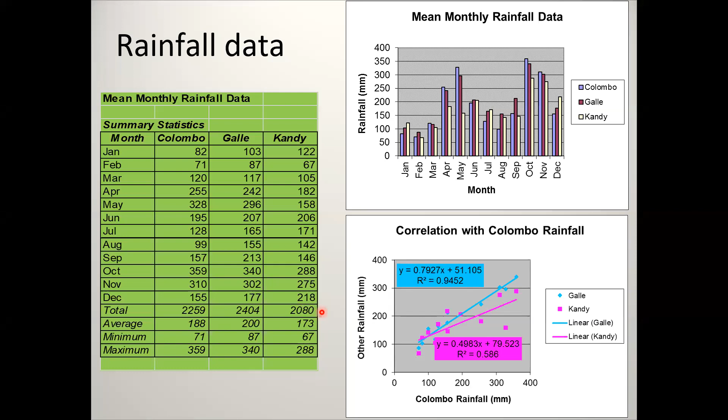Average rainfall for roughly the entire country, half of the country, annual rainfall kind of figure. What is it? This is the total. Yeah, total. And if you average it out, average the total of Colombo, Galle, and Kandy, we can get a rough idea about rainfall in Sri Lanka. I am not sure about that because there is a dry zone and things like that. No, yeah, okay, anyway, thank you for that.

Anybody else, can you tell me what can be done? Somebody has put something in the chat: project the distribution to standard deviation and mean, which will be very useful in decision making. Okay, somebody has suggested a box plot. I'm not sure exactly what you mean by a box plot. I'm just asking for fairly simple things, right?

So, cumulative value? Cumulative, okay, I'll take that cumulative value. So each month you keep adding something very simple that can be done, which I think will give us useful information.

Again, not many students and people do this when they are doing research, is normalizing, right? No one mentioned that. You divide, let us say, Galle and Kandy rainfall by the Colombo rainfall. So we can see here actually Galle rainfall is greater than Colombo, and then Kandy is the least. But if you divide by this, Galle rainfall for January will be something like 1.2, and this one will be something like 1.5. But when it comes here, it will be something like 0.9, because you divide 67 by 71, and this will be something like 1.1 maybe. So if you normalize by Colombo rainfall, that also will give us an interesting picture.

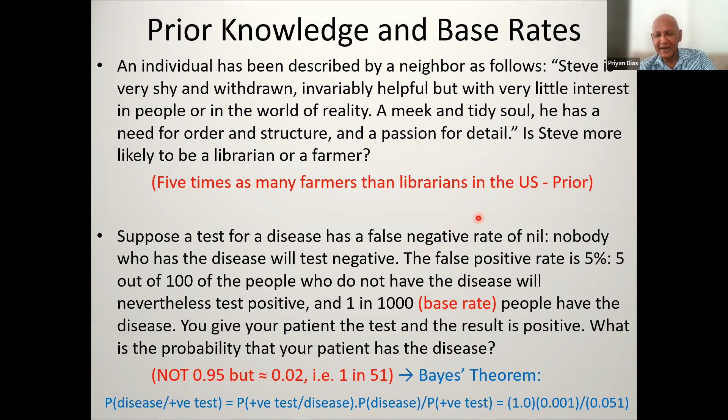Now you might wonder—I did this also just to make this lecture a bit interesting. It's now about half an hour into the lecture, but I won't speak very much more or have this interactive format after this. So the person in charge can ask everyone to mute themselves or whatever, and I will go on like this.

So one of the things about prior knowledge is what we learn from practice, our experience of the world. I've given a few examples of this—what I have called longitudinal corrosion.

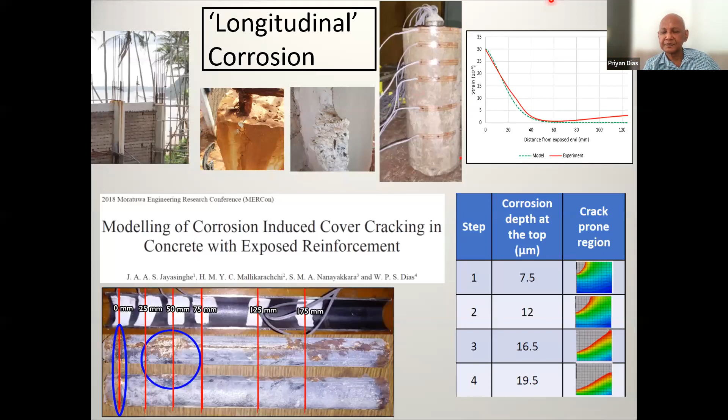Once again, we tried to take a slice of the world. I had to simulate things like sunlight, because the literature says this is affected by sunlight and probably happens between 10 a.m. and 3 p.m., so it's difficult to impose heat. I just used some 200-watt bulbs close to the surface, and to simulate wind speeds, which also create this, I used fans. In order to make this cracking happen, I could not use the actual concrete, but instead used the mortar component so it would be a bit weaker, a little thinner, and manageable in a lab.

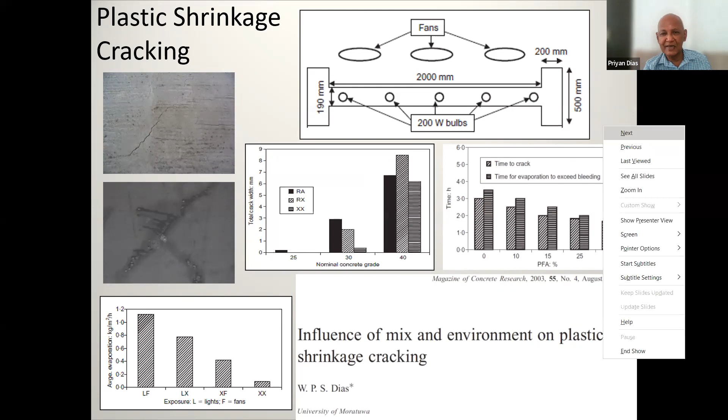So, two examples of getting ideas from the world out there, even though you cannot simulate the world exactly. This is something of a hobby horse of mine, something I'm interested in as a researcher. I'd like to promote this idea of analogical transposition. Big word, and you don't get very much output from it directly, but anyway, I will describe it. You can think about it.

Since the 2004 tsunami, I have been working on things like tsunami resilience. The whole question of resilience has become very important in the world because of increased natural disasters and various other stressors on the environment, whether it is waste, plastic, carbon dioxide, or various other things. So we want systems that are resilient.

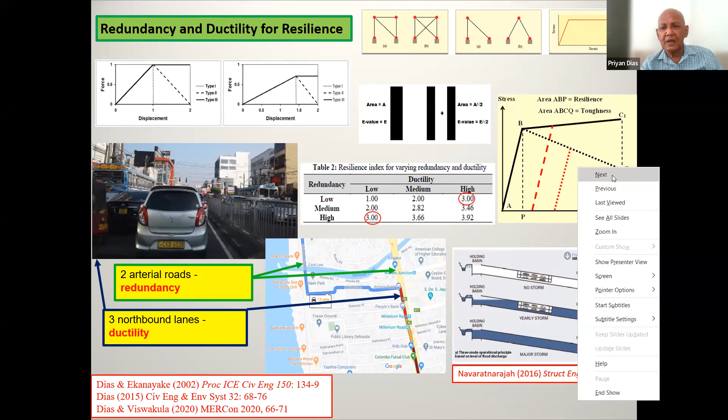Now this is another analogical transposition. This has to do with, what shall I say, structural mechanics again, and I'm borrowing from the field of statistics. Earlier, I used the field of structural mechanics to inform other disciplines.

So I used to wonder whether there were structural mechanics analogies for this. I have to acknowledge Isuru Nanayakkara, who is now doing a PhD in Sheffield, and of course Chintaka Mallikarachchi was also involved in this a bit.

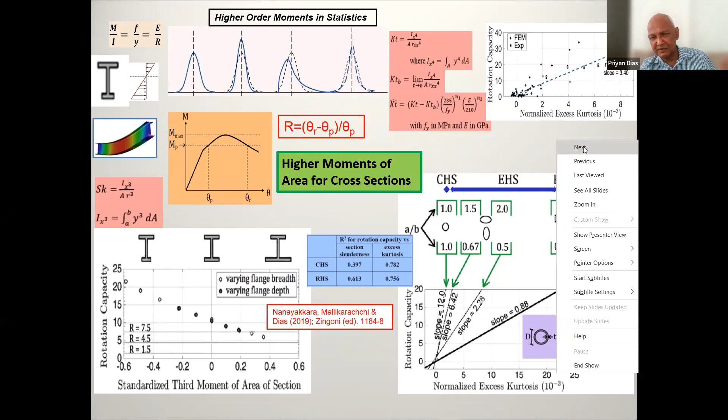So you don't want to have a separate detention area for the rainwater and a park for the people as well. You do both in one. So you don't have redundancy, you save money. But you have to experience deprivation once in a few years. So this is about transferring knowledge, prior knowledge from one discipline into another.

Now this is about some research techniques, transferring research techniques that you knew about earlier, maybe to a new area. This is ANOVA. I don't know whether these techniques are also being done or whether that's not part of this course. But when I was doing my PhD from 1982 to 86, this is my supervisor, Patrick Sullivan. Actually he published this in 2004, but he was working on this with another student even at that time. This paper is called a probabilistic method of testing for the assessment of deterioration, etc.

Basically what it means is if you have a number of variables, you can study the relative influence of each variable. Let's say if you have maybe 3 variables at 2 levels, you have to actually do maybe 6 tests. But if you are clever... and if you have 2 variables at 5 levels, then you have to do 2 to the power 5 tests, or 5 to the power 2 tests, I can't remember now.

Anyway, I was aware of this technique. So when I returned in '86, this was published in '94. I looked at, I applied the same thing for mix constituents and things like that -- the mix proportions, the slump, the amount of compaction, and the amount of curing. And you looked at strength. This has to do with... it doesn't say what this is on, strength and durability. I think this is on strength.

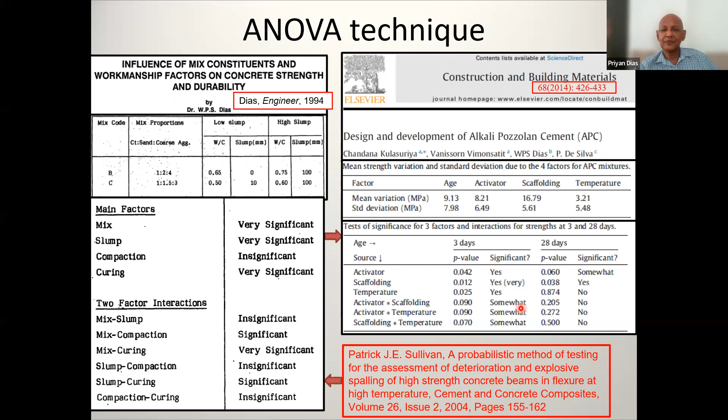So if you have used a particular technique before, you can use it again. I'm going to use, I think, another one of Anjana's research. But before that, originally, this has to do with...

This has to do with qualitative research. Some of you may be in qualitative research. This I did many years ago.

I think maybe soon after the central bank bomb blast, that was in 1996, about what factors contribute to the vulnerability of buildings. So we looked at different case studies.

We did not have case studies properly documented in Sri Lanka. Even if we did, the Ministry of Defense in Sri Lanka was not going to give it to us. But I made some contact with the Royal Military Academy somewhere in the UK, and they were quite happy to give me their documents.

So you look at these documents, look at the description of different events, and find out what phrases are repeated. That's called data, and this data is not like rainfall data. When you combine this data, this is called grounded theory - this whole concept is called grounded theory because it's grounded in the information. It's like you're generating theory from the data.

Then, of course, you have slightly higher level interpretations of this data called interpretation. So for example, reinforced buildings did not collapse, which means reinforced buildings can withstand considerable blast. Masonry construction is weak against blast. So this is a bit of an interpretation.

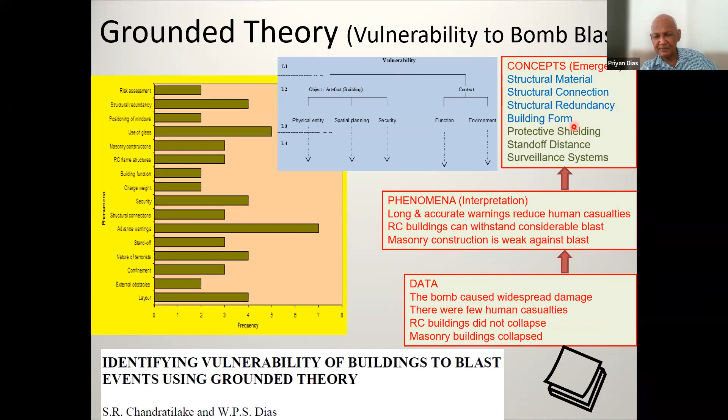Now Chandana brought to the table this concept of integral theory, which is not a bottom-up theory like this one, where you get the concepts or theory emerging from the data. If you think about integral theory, already the top level is determined. It means that if you study any subject, there will be an individual subjective aspect, a collective subjective aspect, an individual objective aspect, and a collective objective aspect as well.

So what we did here in this research was try to marry integral theory with grounded theory. For the top level, we did not generate the top level from these, but these concepts that were obtained. Here I have called it concepts, here I have called it phenomena, or we actually, these are all done together with other people. Here we fitted these concepts into these different quadrants. So once again, research done by other people to be aware of, and how do we apply it to your own research?

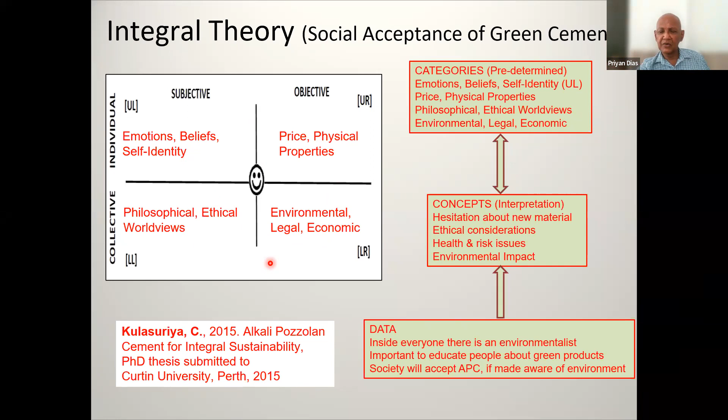Right now, we get a bit more specific because prior knowledge has a lot to do with literature. I think you have already had a talk on literature survey, so that is good. I just want to make a few remarks about the literature. One is actually the way that you structure this literature. Actually, one of my papers, not all, right?

I actually put a table like this as part of the literature review. But this, of course, is in a very narrow area. It has to do with this paper about the influence of drying on concrete sorptivity. Sorptivity has to do with the absorbing of moisture. So there are different ways in which you can dry specimens, different durations in which you can wet the specimen, different strengths and water cement ratios of the specimens, and different sizes, because sorptivity testing had not been formalized or standardized. And then the sorptivity, the absorption, is linear with the square root of T, but for different durations, and then you can calculate the sorptivity. I'm not going to go into all the details there.

When you're doing a literature review, if possible, whether you write it up like this or not, if you do a table like this, then any reviewer of that paper will see that you have a very organized mind. A very organized mind. Some time ago, there was a colleague of mine who was doing his PhD at the same time at Imperial College.

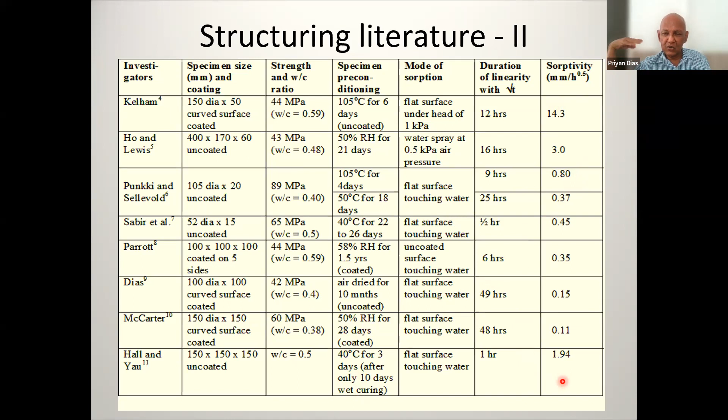So I'm just giving you various ideas. This is now using prior knowledge in a structured way based on the literature. But more than that, very often I find that when people refer to the literature, it's only at the early stage of either their research thesis or the paper.

Now, if you're writing a paper, most times journals would expect you to write your literature review under what is called the introduction. So the introduction serves as where you do your literature review as well. Then you say, okay, these are the gaps in the literature, this is what I want to do, these are my objectives, methodology, then results.

However, once you do this curve, it is always very good. Referees will know that you are trying to locate your work in the general body of knowledge. It's a very important concept in research, because you're not trying to solve the problems of the world by yourself. You have to look at the literature to find out whether somebody has not investigated something. And then when you find something yourself, like maybe this curve, you have to see how other people's work fits into this.

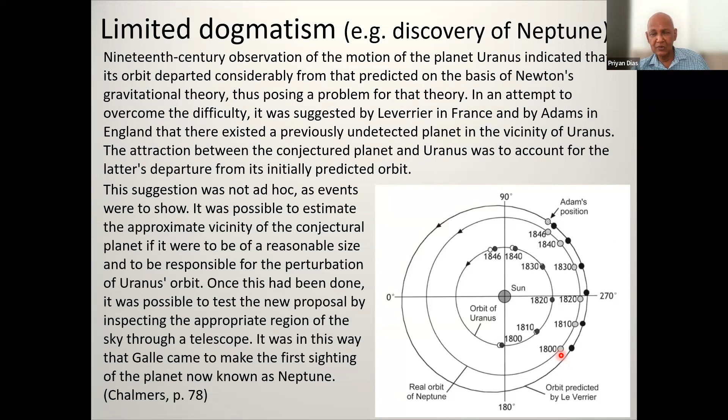Now, how does this relate to research? This is some research I did about whether you trust the authority or reject the authority. Many of you know that if you replace Portland cement with fly ash, many cement companies are doing that. Fly ash is also being produced in Norochcholai, so it's getting rid of some of the waste, though not all of it. People around there may be having some difficult times.

There's a big debate about whether we should have another coal power plant or not, but the PFA part of it is being used. In fact, some of the PFA was used for the Lotus Tower. The PFA is actually integrated into the cement, and that's called Portland pozzolanic cement or something like that. We were asked by this cement company, now called INSEE, I think - earlier it was called Holcim, before that Holderbank - when it was Holderbank, they asked us to do this.

So you can see Professor Nanayakkara has collaborated with me in a lot of this work, a lot of the concrete work.

Now what happens is, let's say 15% of cement is replaced with fly ash - especially early on, you're going to have lower strength. So here you see the strength ratio - I talked about a ratio of rainfall, this is the strength ratio. When you take ratios, you get interesting insights. The ratio of pozzolanic cement strength to pure OPC cement strength should be low at low ages - at 7 days it's something like 0.83, and then at 14 days it gets close to 1. At 28 days it can be even equal or more, and then it can increase further.

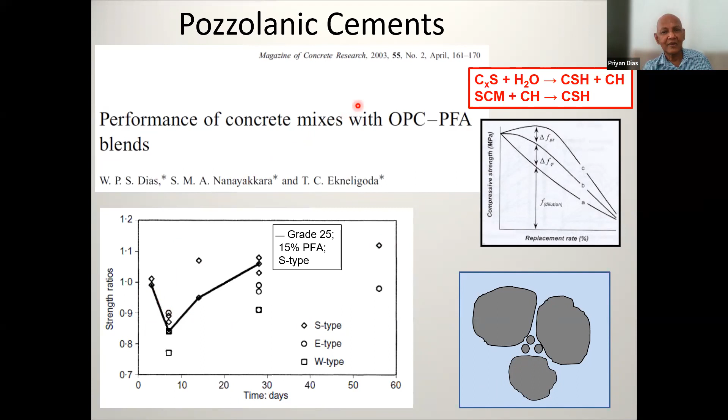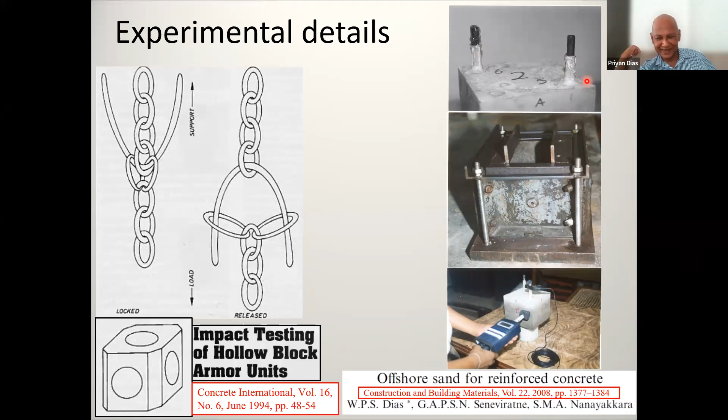One last thing, I mentioned this earlier. This is a new theoretical idea about excess kurtosis. I have nothing to do with this - this is my student, Isuru Nanayakkara. Earlier there was a relationship between skewness and rotation capacity for an I-section.

But for hollow section, he used what is called excess kurtosis - the kurtosis of the section, like a statistical distribution, the distribution of material in the section, minus the kurtosis at a theoretical zero thickness. I will not go into this, but this concept of excess kurtosis.

Now, actually I wanted to call Isuru and ask him how he got this idea, but in the literature there is this thing about positive kurtosis. This is a normal distribution in dotted lines, which by definition has a kurtosis of 3.

So positive kurtosis means higher peakedness - it has a greater peak, and also fat tails like this, but peakedness is the main characteristic. This idea of kurtosis in excess of a normal distribution is there in the literature, so maybe Isuru would have come across that as well.

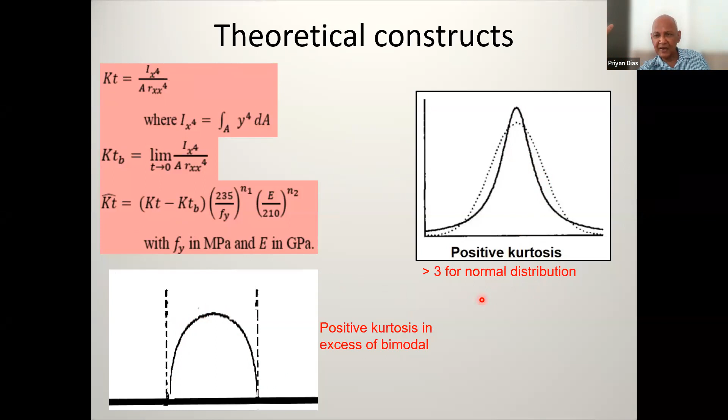So even these theoretical constructs, we come up with various ideas. Maybe it depends on us keeping our eyes and ears open to the knowledge that exists previously. Okay, I'll finish with this one.

The years go back to 1675. So, prior knowledge - Isaac Newton is supposed to have written to Robert Hooke. You know both those names - Hooke, we get Hooke's law from, but Newton, of course, is the much better known scientist. He's supposed to have written saying that if I have seen further, it is by standing on the shoulders of giants.

Now there are various stories about Newton. Some people say he was a great person intellectually, but others say he was rather disagreeable and had various disputes with scientists, including Robert Hooke, who is supposed to have been a small-made person. So one interpretation is that Newton was saying, I have stood on the shoulders of giants, but you're a short man and I have not taken any of your work into consideration. We don't know Newton's motives - let's not judge him, since this was done in 1675.

But recently, the UK, which has a new king now, has put out a two pound coin with this engraving on the edges. Actually, I have some coins from England from some time ago, and you see on these coins, even the 1 pound coin, and certainly the 2 pound coins, various phrases like this.

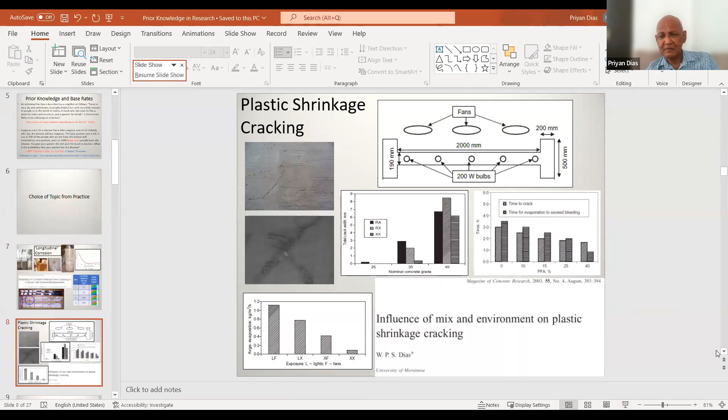I remember I showed you that table, referring to Nick Weinfeld, who at one time tried to use his students' literature reviews to do something like pattern recognition through neural networks. But even if you don't do that, if you're able to structure your literature review this way, maybe with a few other visuals, and demonstrate a very good appreciation of the state of the art in the field, together with your supervisor's help, you may be able to get it published as a review paper. Otherwise, it's normally for very eminent people -- I'm not saying you all are not eminent.

If the results of research were not in line with previous results, is the research we get enough to justify that the previous knowledge should be altered?

Most of the time you can't. That's why, like the example I gave with the 3-day strength ratio between pozzolanic and OPC, you have to give a reason why your work is different. And that may be something very valuable -- giving a reason as to why your result is different.

Undergraduate students get exposed to this in a small way when doing experiments -- they're told to compare experimental results with theoretical values and explain why they differ. Students should get some exposure to that. They might say experimental error and so on. But when doing proper research, it's maybe not so much the errors -- maybe you were trying to maintain 100% relative humidity and couldn't quite do that, or something to do with the surface-to-volume ratio that made your result different.

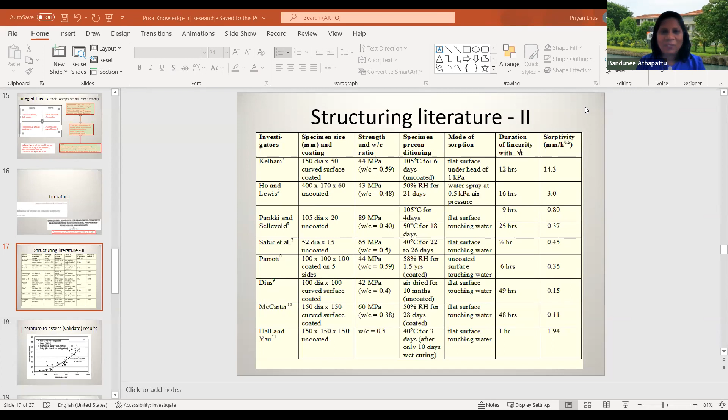Thank you. All right, thank you for asking me, Bandunee. Thank you. Thank you, sir. Thank you so much.